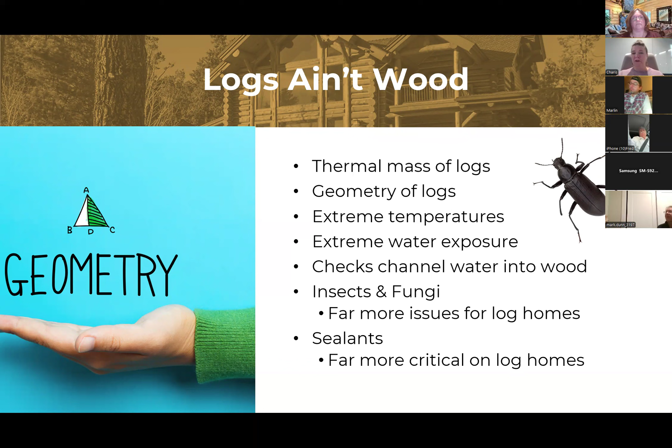And then, of course, sealants that you would normally put around windows, trying to seal the building envelope. Well, the building envelope on a log home is a little bit more extreme than on conventional construction. So we're going to go through that. In case you didn't know, the average log home has a mile worth of sealants. Now, on a handcrafted log home, that's less. A well designed and well built handcrafted log home, you won't have quite a mile of sealants. But there's a lot of caulking that is used on a log home. That really makes it different.

Logs really take the heat. Relative to conventional lumber and siding, when you see the angle that the sun can hit the log on this upper curve, especially, it gets burnt very quickly and very easily and at a very different rate than on the lower curve of the log, which creates some added stressors. On siding, you're getting that sun to hit and then it reflects straight off. So it can really cause a lot of issues with logs. They get really hot. And here's just an example.

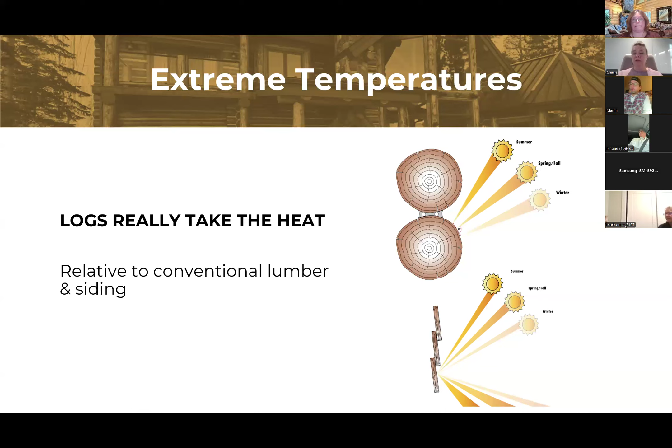The other thing, logs check. We all know this, logs need to check. They have to have a pressure release at some point in their life. But of course, a check in a log is much more extreme than a check in a 2x4, which they're really trying to prevent completely.

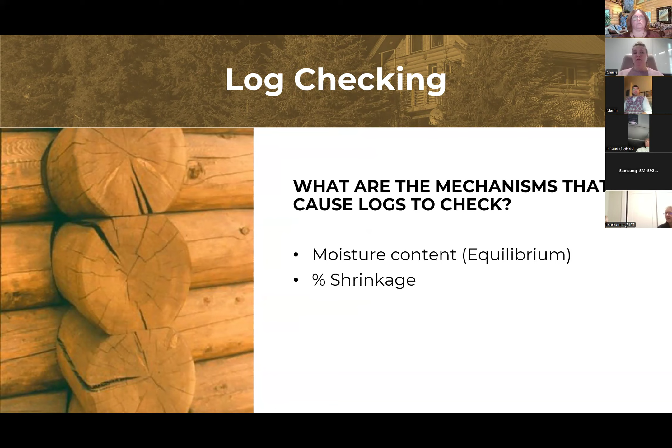Plus, there's a whole lot of shrinkage that goes on with logs, and in three different planes. So you have the tangential, the radial, and the longitudinal shrinking of a log. So you're having to account not just for it getting smaller and then bigger again as changes in humidity and temperature take place, but it's also getting a tad bit shorter sometimes.

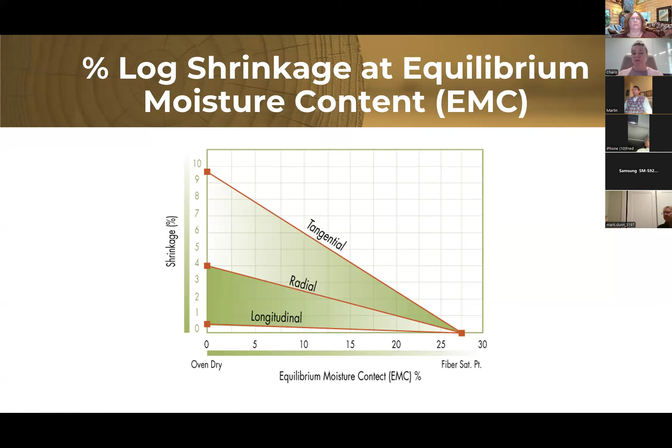Those pores are opening up and creating more movement. As the equilibrium moisture content changes, that log changes, and it's going to continue to do that throughout its life. Even when you have really good sealants and a really good coating on there, moisture is still going to want to move via capillary action in the wood fibers themselves. You're always going to have some taking on and giving up of moisture, and you have to account for that with whatever you put on those logs because they're going to be constantly moving. They're in constant dynamic motion.

Here are those three planes of movement. So you have your tangential here, you have your radial going in and out - that's when we sometimes can see twisting, and that's a sign that it's not a super great log. And then your longitudinal, of course, across the front plane of the log. Lots of movement going on with a log.

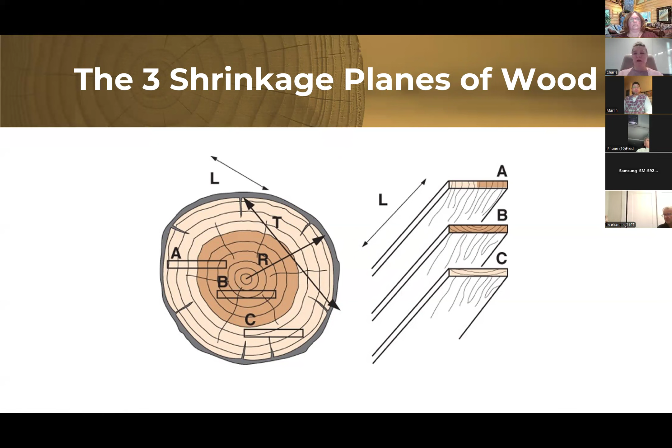You have a variety of different checks. You have some of these little mini surface checks, and then you have some of the deeper ones, all of which allow a different amount of moisture in and stress the products used a little bit differently, and all need to be treated differently so that you're actually making sure to limit moisture and insects getting in there while allowing the logs to still move, because they need to do that to allow for that pressure release.

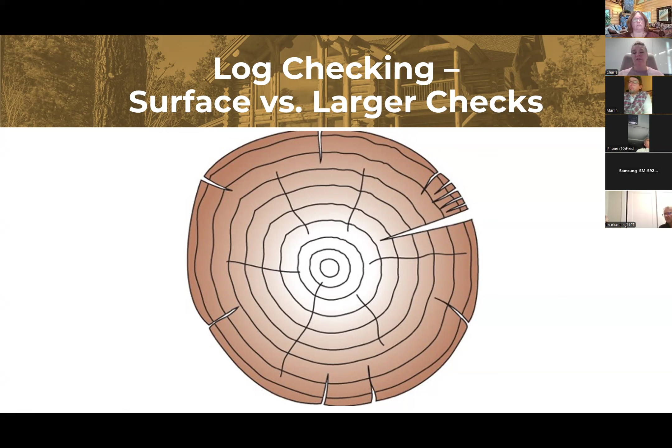So all of that - the upper curve of the logs taking the full force of the sun, all those checks allowing water and critters and everything else in, and just the sheer size and mass of logs that allows them to move more - it stresses all of the applied materials more. So all of this underscores the need for specialty made-for-logs coatings and sealants on log homes. What you're going to get at the home store is generally not going to be sufficient for a log, and I'll explain more of that later.

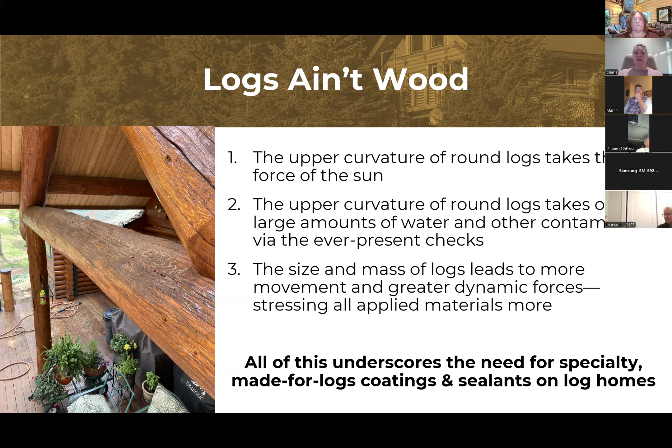So now we know that logs ain't wood. We need to talk about combating all of that negative energy. And so these are the 5 prerequisites for finishing a log home.

Hang on, I'm going to plug into my screen here. Todd joined me in the room. Say hi, Todd. Sorry I'm late, everybody. It's Tardy Todd. Tardy Todd. That's what we said.

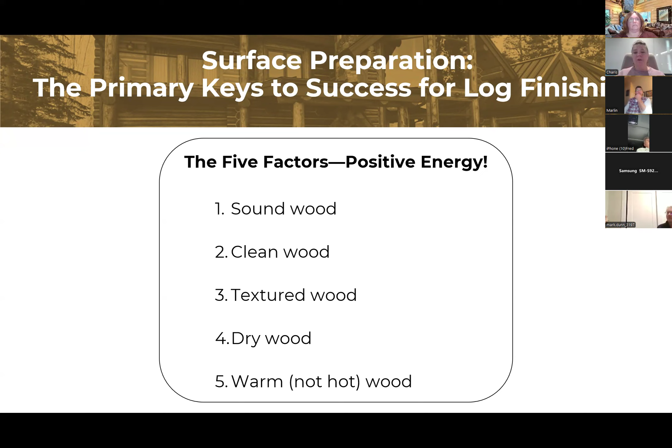So these are the 5 prerequisites that any log home needs to have in place in order for the coatings, the sealants, anything that's applied on top to have a good chance of being very durable. So those 5 factors are sound wood, clean wood, textured wood, dry wood, and warm, not hot, wood. I'm just going to go into all of these here.

Sound wood. This means getting rid of all of the UV and water damaged, loose wood fibers prior to staining and applying a sealant. This applies to both restoration work and new construction. And I know that there are some who will say, I just need to do a quick power wash on new construction. Well, I'm going to show you a slide in a second that's going to show you why that's not true. And sound wood is the most often overlooked and poorly understood or misinterpreted piece of those 5 prerequisites.

It's usually done poorly and/or insufficiently by the novice, and something that's just easy to overlook, because the blonde wood that looks blonde to us on the outside isn't always necessarily in the best shape. So looks can be deceiving, is what I always have to tell people.

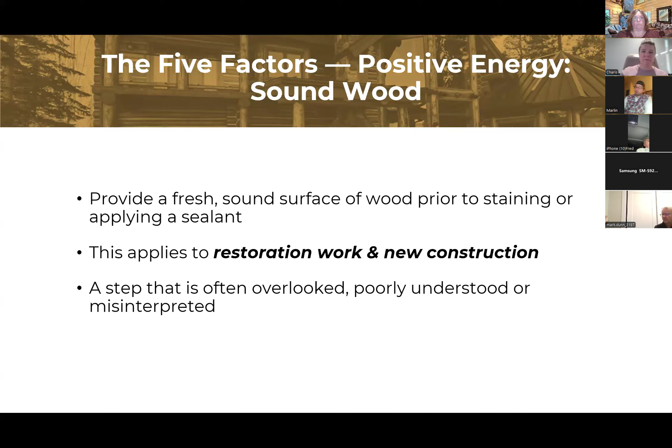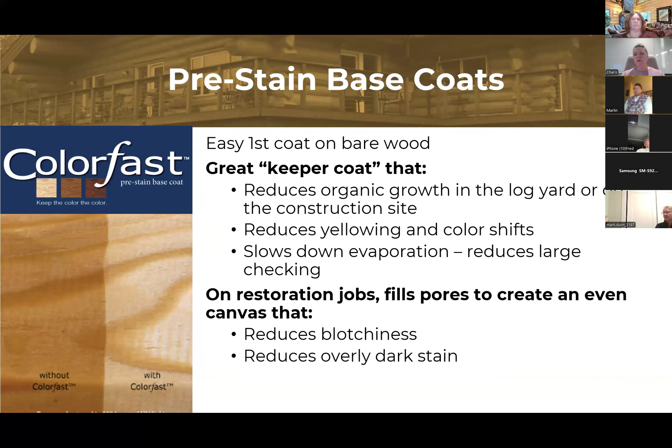On restoration jobs, if you're doing refinishing or some log replacement and you want to match the new wood with the old, Colorfast helps create a more even canvas that can reduce blotchiness and overly dark stain once they apply the stain. So these pre-stain base coats come in really handy when trying to reduce the damage that can happen if you otherwise just leave the wood bare.

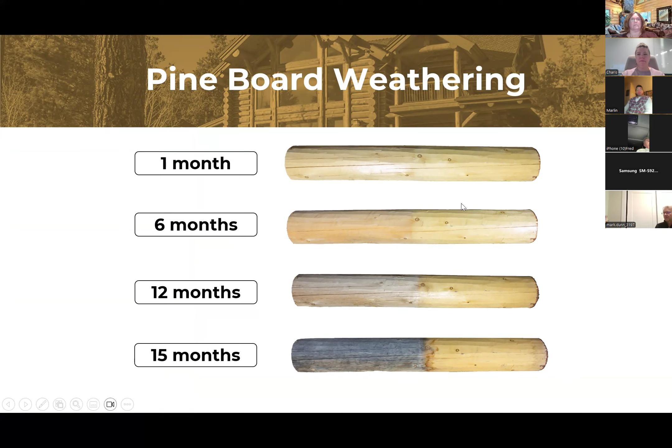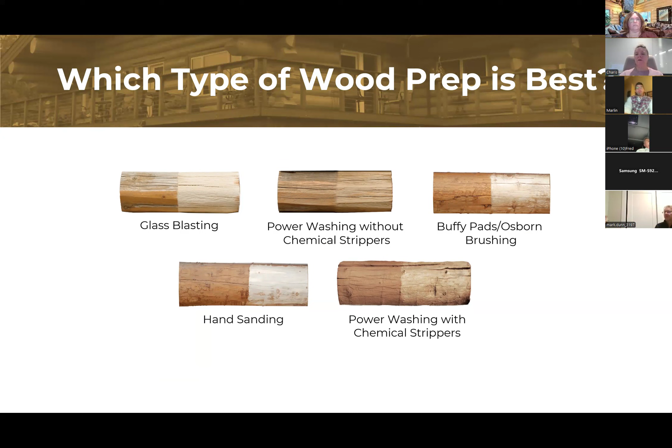I won't go into all the different types of wood prep. We're fans of dry prep to remove all that unsound wood. Glass media blasting and power washing can be done well, as can hand sanding. Sometimes chemical strippers are required if you're removing a previous coating. There are lots of ways to get to where you need to go—it's just important that everything gets off. If you have questions on the pros and cons of those, feel free to reach out. We'd be happy to talk you through those.

So the next one—we have sound wood, next is clean wood. Sometimes cleaners are absolutely necessary and should be used. They're the only thing that will kill mold, mildew, and algae that's on the surface. No matter what cleaner you use, there are lots of types out there—oxalic acid, oxygenated bleach, plain old chlorine bleach. Always test to see which cleaner is most appropriate.

You don't want it to discolor anything, and always rinse or power wash thoroughly after a cleaner to thoroughly neutralize it. Otherwise, you could end up with discoloration, and it could actually continue to eat at the wood fibers—all the work you've done removing unsound wood fibers, you've just added back on by using a cleaner that hasn't been neutralized. So whenever you're using cleaners, always thoroughly neutralize them. There are some you can use on the interior that don't require as much rinsing, but you have to be very careful to test those first to make sure they don't discolor anything.

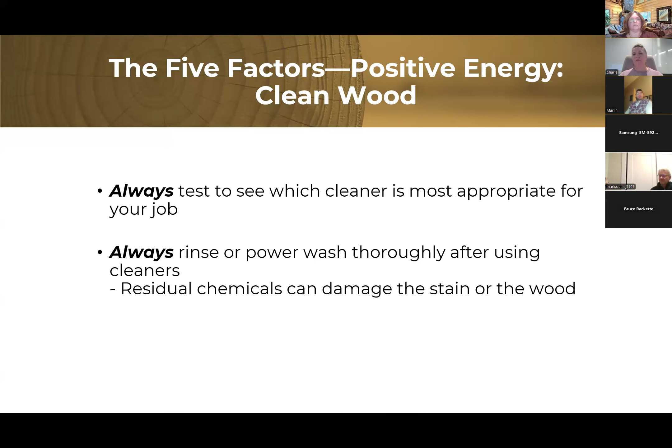Next one, textured wood. This sounds silly. On the interior, feel free to have your baby butt smooth wood. It looks nice and pretty and shiny and it's easy to clean. But on the exterior, texture is the name of the game.

The more texture there is, the more surface area there is. The more surface area, the more stain you get on the wood. The more stain you get on the wood, the more protection you have. Plus, texture really helps prevent the loss of stain adhesion when you're using a surface stain. So texture is a must-have.

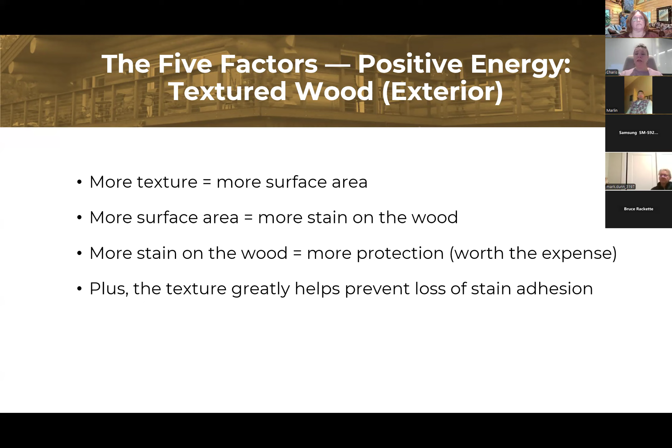The process of media blasting or sanding usually does that. Power washing usually does it. You don't want to go smoother than a 60 or 80 grit on the exterior of a log home.

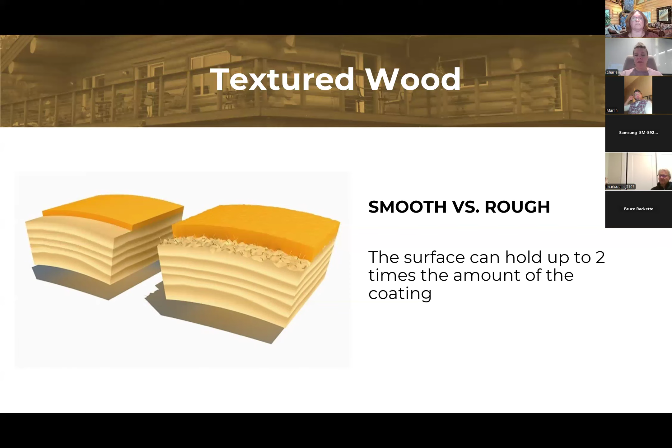Some homeowners don't like that look, and so we tell them, hey, if you want to go smoother, go ahead, but you're going to have to do more frequent maintenance. So really it's up to you. If they've got the money and they want to restain every few years, sure, go ahead.

The next factor, number 4, dry wood. This means before putting on coatings—this is not for building. Building with green wood is a completely legitimate way to build. I know a lot of handcrafters who really prefer building with green logs, but before putting coatings on, it's best to get things down to a lower moisture content.

Now, when you're using the Color Fast or the pre-stain base coats, this isn't a must-have. Those are pretty breathable, and there are stains out there that are pretty breathable, but at the end of the day, it's better to have the wood close to its moisture equilibrium before you start finishing, so you're not stressing the coatings with excess osmotic pressure from all that moisture evaporating out and wanting to come through the coating.

So getting it to the right moisture content is best. Coastal Alaska or BC—Victoria, BC—19% is going to be about as low as you ever get. If you go down to the Southwest United States, Arizona, 6% is going to be what's comfortable for those logs. So get things as close as possible.

If you're doing a refinishing job and power washing, I always tell people: take your moisture meter out, take a measurement before you start, and you want to be back to that level before you start staining. Depending on your humidity and temperature, here in Colorado that might take a day, and in the Southeast United States, where it's super humid, it might be a week. So make sure that wood is really dry to the moisture equilibrium.

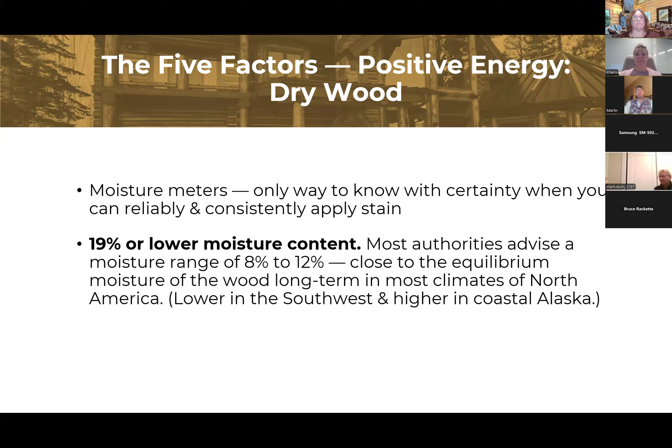And then finally, the last prerequisite: warm wood. Log surface temperature is really the key here, not the air temperature. Just because it says it's 60 degrees outside, once that sun hits that upper curve—we saw that in December temperatures where it was 4 degrees Celsius, 40 degrees, but it was getting up to be 140 on the surface.

So surface temperature really matters when you're applying coatings and sealants. You don't want to create a flash cure. Surface or air temperatures really do matter in the wintertime, especially if you're using anything water-based—a water-based caulking or chinking, water-based coatings. They do need a warmer temperature to cure. So surface temperature is key, but air temperature matters too, especially overnight when you're applying sealants.

Use an infrared thermometer—they're really great. They come in handy when you're grilling too, when you want to check the temperature of your meat. Did I get a good sear on it? So infrared thermometers have multiple uses, and they're about $20, maybe $25 for you up in Canada on Amazon. Very easy to get a hold of.

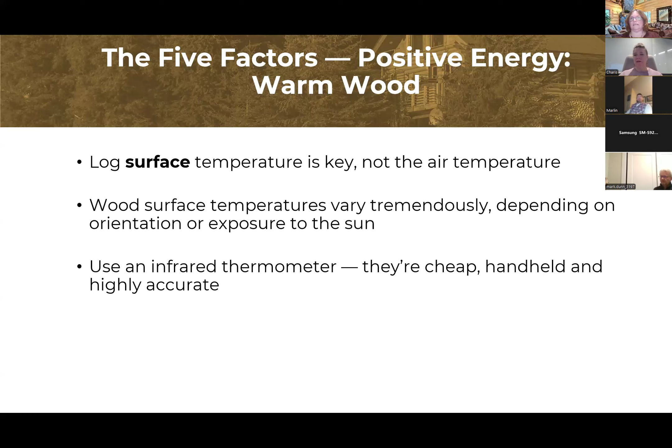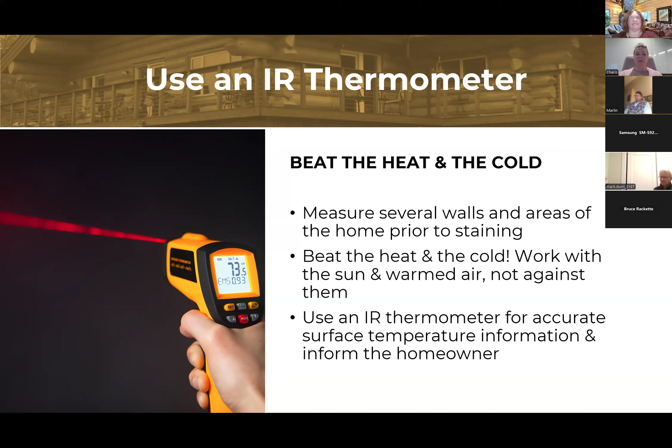Because we know logs get hot, it affects everything else applied to logs. So I'm going to go through some stain application and technology basics with you guys. Even if you're not doing the work, this is information you can pass on to people who might be subcontracting for you, or homeowners looking to have somebody do the work for them. You want to make sure this is information they know.

So I'm going to jump in. Here are just some very basic exterior stain application best practices. This seems basic, but we see it all the time: mask off anything that you don't want stained. That includes the deck - if you have specialty decking, I've seen some really good mahogany decking ruined by overspray. Or if you have any Trex or anything like that, mask off anything that you don't want stained.

Do not stain on a windy day. Stain is so very lightweight, it's not like paint - it can get picked up by the wind and get carried to nearby vehicles, or plants and that kind of thing. So try to avoid that - a breeze is nice, a breeze will keep you cool.

Wind is no good. Always intermix stain from different lot numbers. They're just like anything else - there's going to be lot to lot differences in the color. So if it's a different lot number, you need to be intermixing.

Plan your work to avoid surfaces being too hot or cold. Work in the shade. Flood spray that first coat, making sure to pay special attention to filling checks and cracks, and we'll talk about that in a minute.

Back brush vigorously, get your back into it. This is not brushing out any runs, light brushing - this is a very vigorous, forcing this into the wood back brushing. The second coat is going to be a lighter, regular kind of back brushing to catch drips. You're really using that second coat, if you're using a film building stain, to build the right thickness of that film and even out color and sheen.

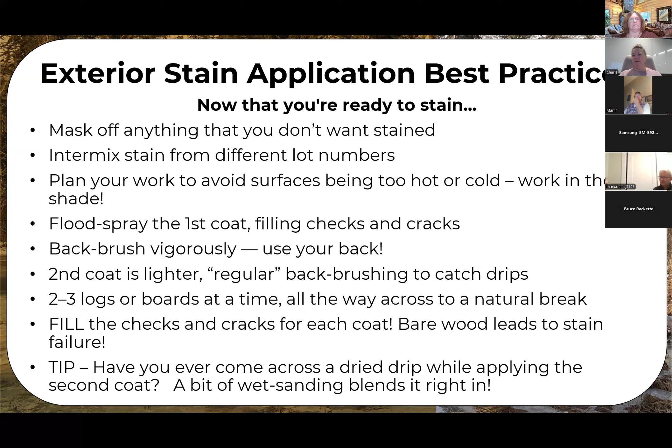So let's talk about end grain. There's a lot of wicking action that happens on end grain. Wood cells are kind of like a bundle of straws - if I were to hold up a whole bundle of straws and you see all the holes through the straws right there, that's exactly what wood cells are like. And those ends, when they get cut off, are designed by nature to create capillary action.

We all think that gravity is the name of the game, but capillary action forces moisture up the tree, that draws moisture up the tree. When you cut that tree down and cut off the end, that moisture, that capillary action still wants to happen. So soak those log ends. If you don't want to be too dark, use a couple of coats of the pre-stain base coat like Color Fast and then the stain, but soak them with as much stain as they will take so that you are preventing that capillary action from happening, which can eventually lead to rot if you're not careful.

And I guess I would be remiss if I didn't mention exposed log ends are a really bad idea. The wider the overhangs, the better. You really want to be protecting those logs from moisture and sun as much as possible. So we are big fans of 4 foot overhangs as a minimum. And if you can't do that, you're going to have more maintenance, so just be aware of that.

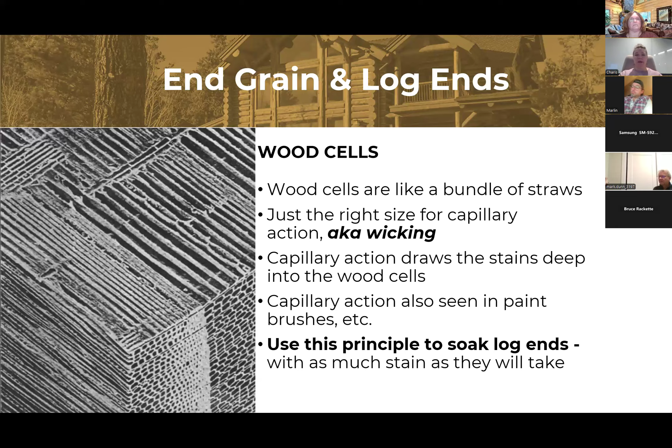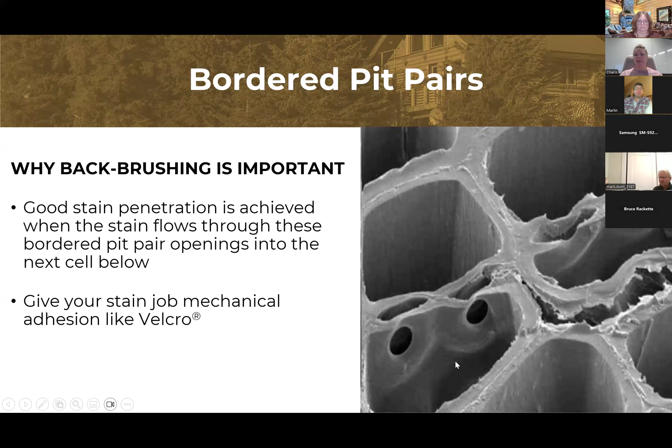So what happens: you push the stain in, you open up this little flapper valve, push the stain in, and then that flapper valve closes again. Now you have stain inside of that bordered pit pair, really anchoring that stain into the wood cells.

That vigorous back brushing really creates much better durability of the stain. A little light brush, like you would if you were just brushing out runs, is not going to do the trick. You really do have to get your back into it. We always recommend the 4 or 5 foot long stain poles that have the 5 or 6 inch deck staining brushes on the end of them, and you just push and get it in there.

When you're staining, it's best to have at least 2 people doing the work - one spraying and another person coming right behind and brushing everything in very vigorously.

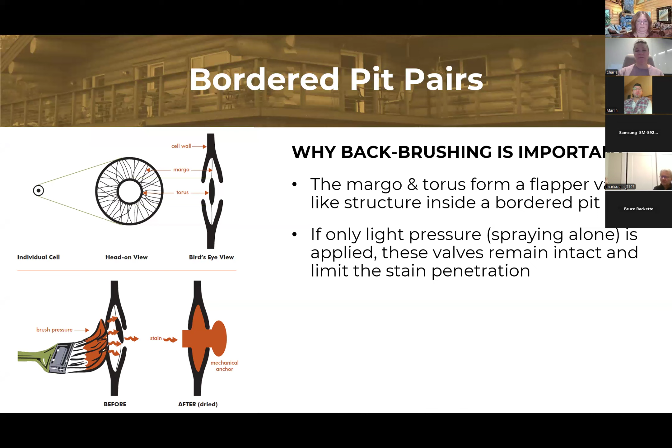This is probably one of my favorite quotes: not back brushing is like applying tape without pushing it down. It's a very good word picture. You wouldn't just let the tape float in the air and see where it lands - you're going to put it on the surface and push it down. That is exactly what back brushing is doing for you.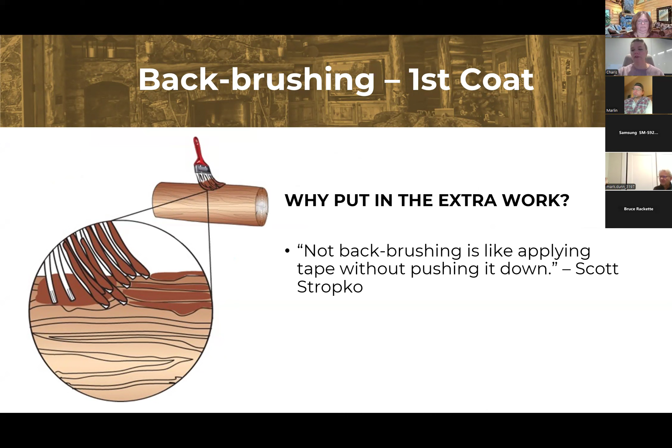In part because you haven't back brushed, in part because you haven't done maintenance. So maintenance is important to help fill in these little pinholes and create that even coating and prevent some of this ugliness from happening. But it also matters how good your stain moves, meaning how elastic it is.

There are a lot of stains out there that have absolutely no elasticity or flexibility to them at all. And as we talked about earlier, logs are always moving, so you've got to have products that can move with it. If you're using a very rigid stain that can't move with the wood, these pinholes are going to happen much more frequently and much more quickly.

I'll show you guys some of our exposure panel testing - we've done some exposure panels here in our backyard where we've seen stains fail within about 4 months because they can't handle the freeze thaw cycles of our weather here in Colorado. So having that elasticity is really important.

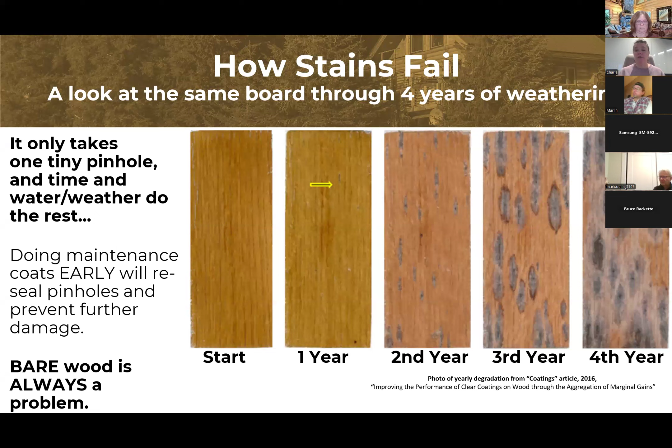So, speaking of stain types and how they perform - they're really more than just oil and water-based, believe it or not. There are deep penetrating oil stains, shallow penetrating oil stains, and hybrid stains. And then there are surface stains - those are all water-based acrylics. I'm going to go into each type of these, their pros and cons.

They each have their place in the world. We are advocates ourselves of any sort of film forming stain, which are always going to be the shallow penetrating ones and the surface stains on log walls. Deep penetrating oil-based stains don't tend to last long enough, and they are not compatible with sealants, meaning the chinking and caulking that are applied. That can cause issues if there's a crack or a check or point that opens up and you need to seal it and you can't because those oils are on the surface.

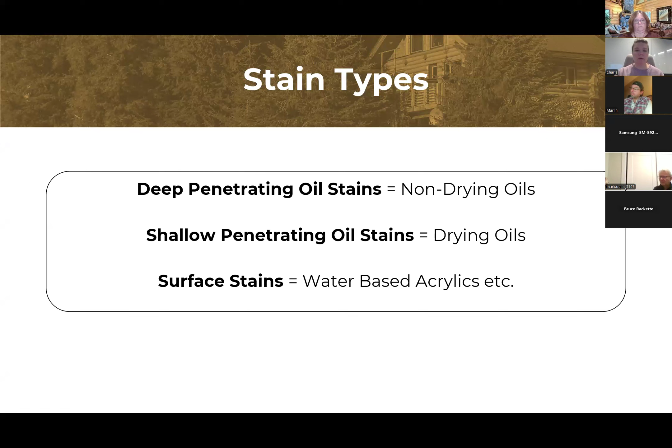But let's go through these different types and what their pros and cons are. First one we'll start with is those deep penetrating non-drying oils - think motor oil, or a lot of them these days are paraffin waxes, sometimes mixed with a drying oil like linseed oil or something like that. They penetrate thousands of cells deep and never stop moving.

So they'll go in 3/4 of an inch, even more. I've seen cross sections of logs that were 12-inch logs where that stain was about 4 inches deep in there - they penetrate very deep. They claim to restore dried out wood, which I suppose is true. It's like throwing some motor oil or vegetable oil on something - it's going to moisturize it.

But again, the problem with these is that sealants aren't compatible and they leave the surface completely without any protection. And so I like to think of deep penetrating non-drying oil stains kind of like putting on an SPF 8 and calling it good. It's going to last you for a little while, give you a little bit of protection, but as soon as those really dive in deep, that surface is unprotected and UV damage is the gateway drug, if you will, of any other damage, of moisture getting in, of insects getting in.

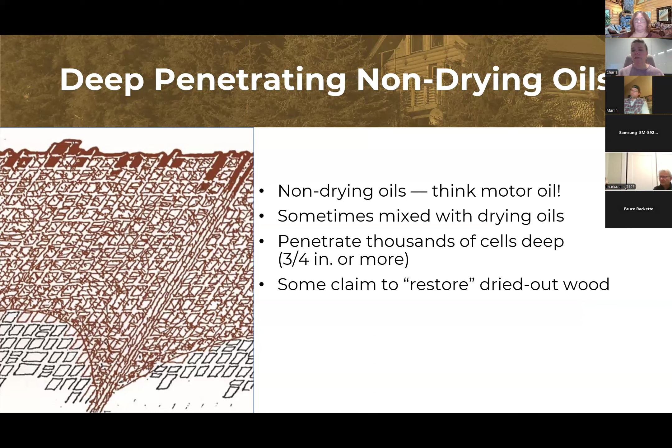The sun comes up and it starts to really chew away at the wood fiber and the lignin, and now moisture can get in. And it doesn't matter if you have oils down in there 3 inches deep, that surface can still get rot started because it is unprotected.

There are some advantages to deep penetrating non-drying oils. There are no lap marks. They're very easy to apply, very easy to maintain. They're great on shingles, fences, sometimes on decks and handrails, depending on how much stays on the surface. There's not actually much of a need to backbrush, as I talked about, because oils are creepy. They're always liquid. They always move.

We have some little containers of deep penetrating oils that we pass around in our contractor training seminars that we've had in those containers for 15 years now, and they're still liquid. Those oils never dry. They never get to a solid state. They're going to stay in that wood forever.

The weaknesses are sealants and chinking won't stick to them. They can destroy the adhesion of existing sealants and chinking. They have very poor durability, again, because nothing is left on the surface. Usually requires yearly or every 2-year reapplication. Depending on how much wax is in there, there's a lot of dirt pickup that can happen with them.

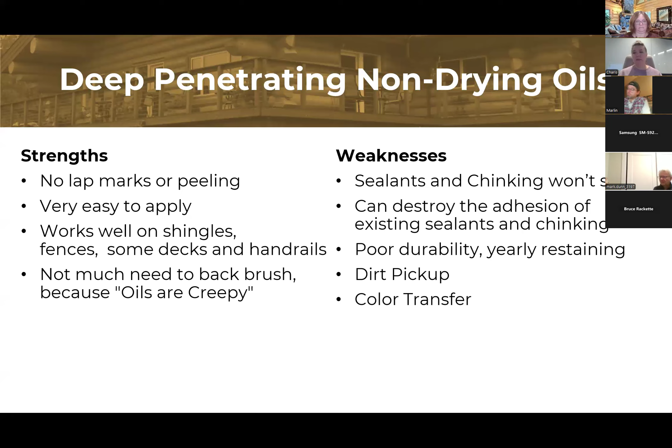And especially early on, color transfer can happen. You do not want to rub up against the wall of a log home that's been stained a week ago with a deep penetrating oil because it's going to get on your clothes. So you have to be very careful about that.

So the next one, the shallow penetrating drying oil stains, these are also considered hybrid stains. The water and oil emulsions, so they have some alkyd resins in them, but they are in a water base. This is the traditional type of stain that's been around for years and years. Oils dry as they react to oxygen and crosslink. They go about 5 cells deep on a good day. They are going to form a very thin, maybe 1 to 2 mil thickness film to give you that UV protection.

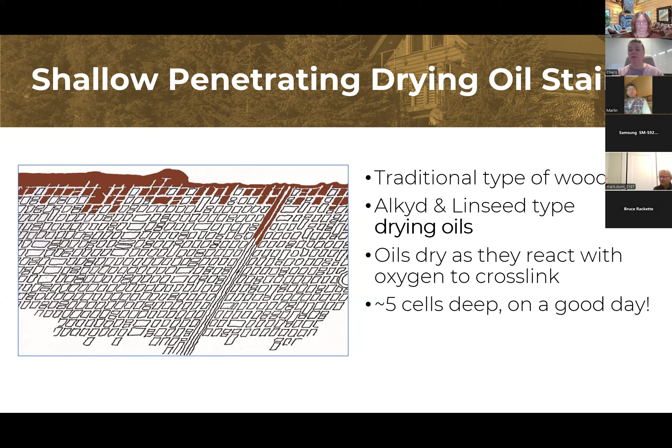So they're a good choice, especially on a home that has previously had a deep penetrating oil on it. These are your safest bet. You won't have to worry about potentials for incompatibilities if you were going to switch to a water base.

The strengths of these, they have pretty good penetration. You can recoat with no problems. They're compatible with most sealants. The oil-based versions can go over most existing stains. They are the most beautiful of the stains that you can get. And they're generally easy to apply. That first coat will require some back brushing, but not anywhere near as much as a water-based would.

The water-based versions are easy water cleanup. They dry very quickly. They're considered greener because they are lower VOC as compared to most oil-based stains that are solvent-based, have a lot of mineral spirits or PCBTF. PCBTF is a chemical that is starting to be outlawed in a lot of areas. So those water-based versions are sometimes a good alternative to that.

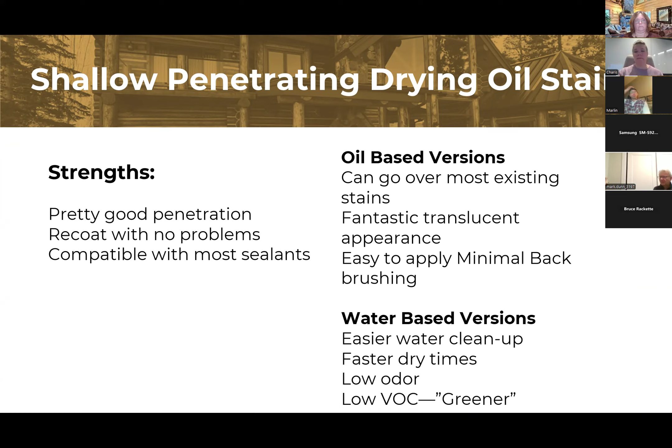Their weaknesses, all drying oils will get brittle with age and then crack, which then means that they'll peel and erode. And so that means that if you aren't keeping up on routine maintenance, you're going to have to go back to bare wood sooner rather than later.

Based on what we've seen so far, the longest you'll get with routine maintenance out of a drying oil-based and a true solvent-based stain is about 17 years. And that's with doing recoats every 3 to 5, depending on the exposure and the side of the home and that kind of thing. Whereas with a water-based acrylic, our water-based acrylic in particular, we have homes out there that have been going on for 25 years now without having to go to bare wood. But these shallow penetrating drying oils are generally going to be your only option, like I said, when there has been a previous non-drying oil on there.

The other challenges with these is that urethane products, they do not breathe very well. So those can be used interior, but we don't recommend them exterior, besides the fact that urethanes are usually much more rigid. You have that solvent or oil odor. There's some VOC restrictions. They're getting more expensive, and lap marks can be a challenge depending on how quickly they dry.

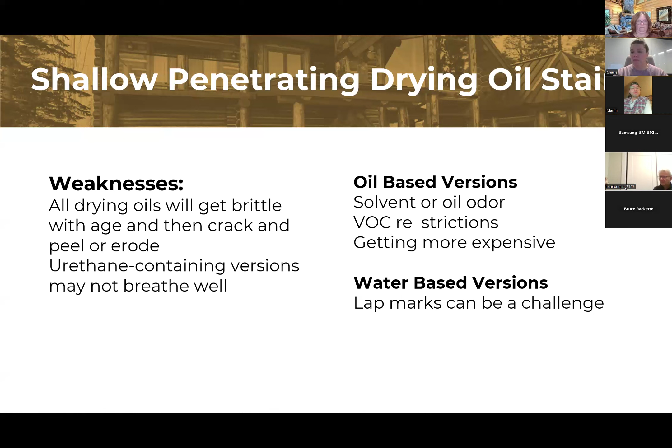So finally, surface stains. These are all water-based products. So you're not going to find a solvent-based in a surface stain. It doesn't exist. These are really adapted from acrylic paint technology. We have all seen tons of homes with paint on them, and paint actually does perform pretty well, but not all of them are created equal, and we'll talk about that in a minute.

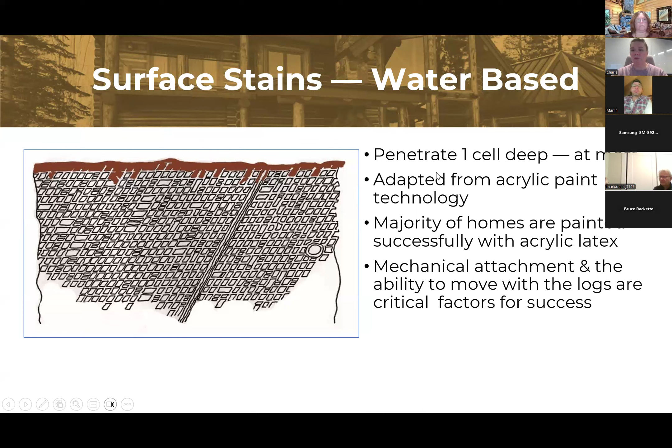They rely on mechanical attachment to the wood, and their ability to move is really important for success. The only way that they penetrate that 1 cell deep is with you forcing them into the wood cell with that back brushing. But their strengths, they're very durable to UV and water. Depending on the brand, they can be very flexible and elastic. So they're not going to crack and peel as readily as a drying oil would.

Easy cleanup, water-based. There's no smell to them. They are obviously very low VOC, and environmentally friendly. Again, these are all based on paint technology. So they're not all going to be the best, but it does matter. We've all seen those, like quick dry painter's caulks, the cheapest paint that you can get at Home Depot or Lowe's. Those are not going to have the same elasticity. So formulation quality really does matter with these.

The weaknesses, wood prep is much more important. So getting down to sound wood, again, because this is relying on mechanical adhesion to the wood fiber, getting all that unsound wood off is much more important. And oil base is going to be much more forgiving with prep that is maybe not as sufficient as it needs to be. They will eventually crack and peel through fatigue. Those that are cheaper and harder are going to do that sooner.

They dry very quickly. Lap marks, especially on a windy, breezy day, can be a challenge. So you really got to watch that and make sure that you are working those 2 to 3 boards across. And then some manufacturers will include silicones, waxes, and other non-drying oils, especially deck stains, which again can interfere with the adhesion of sealants. So you got to look out for those.